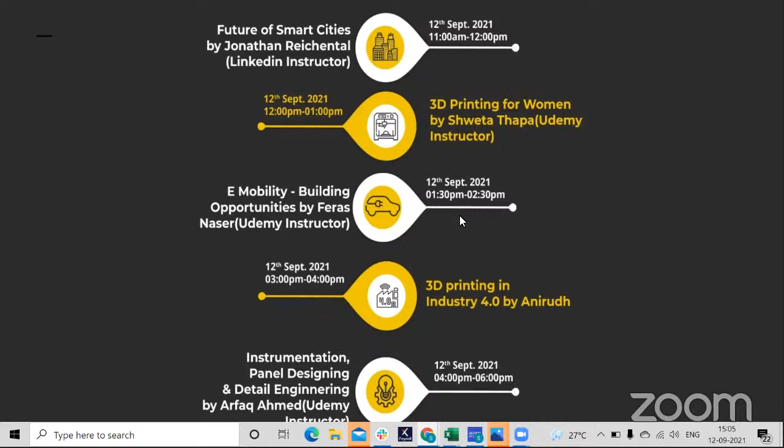At 4 p.m. we are going to have our final workshop on instrumentation, panel designing, and detail engineering by Arfaq Ahmed. He's also an Udemy instructor, and you can get a lot of benefit from that.

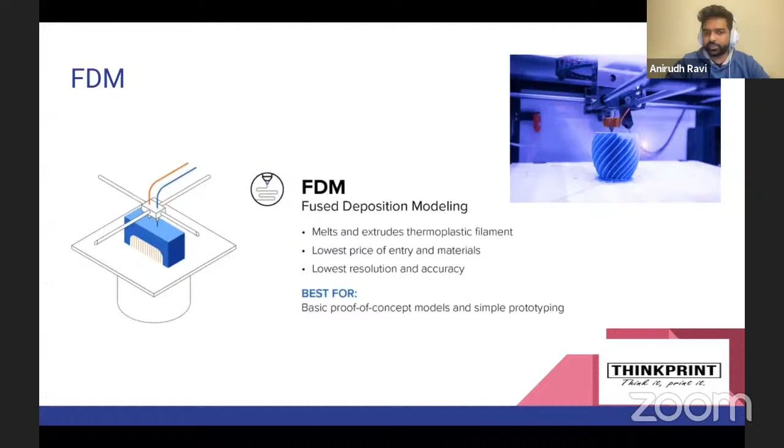Going to the next one, we have SLA, or stereolithography. In my opinion, this is the coolest 3D printing to watch in a time lapse, because you see a structure rising from a pool of resin. Again, using lasers, what this technology does is combine the molecules in the resin and come up with the 3D design that you've had. This technology can again be used for functional prototyping, patterns, very complex designs, and tooling and molds. It's also very light and comparatively very affordable.

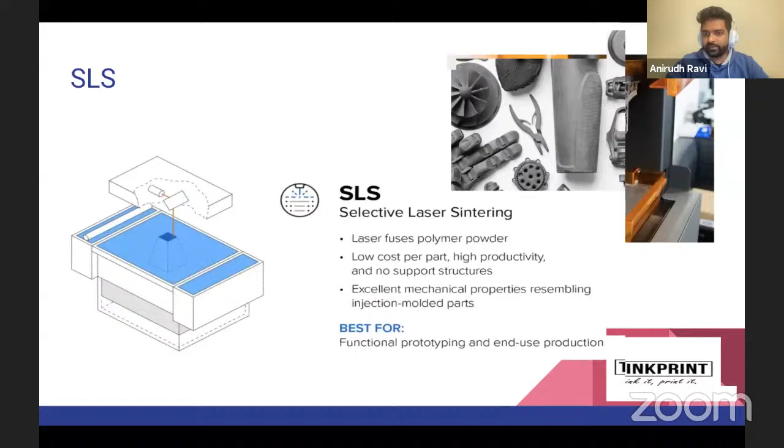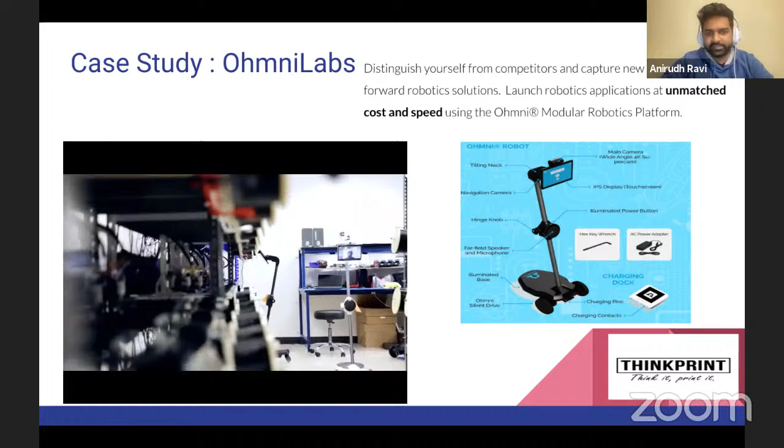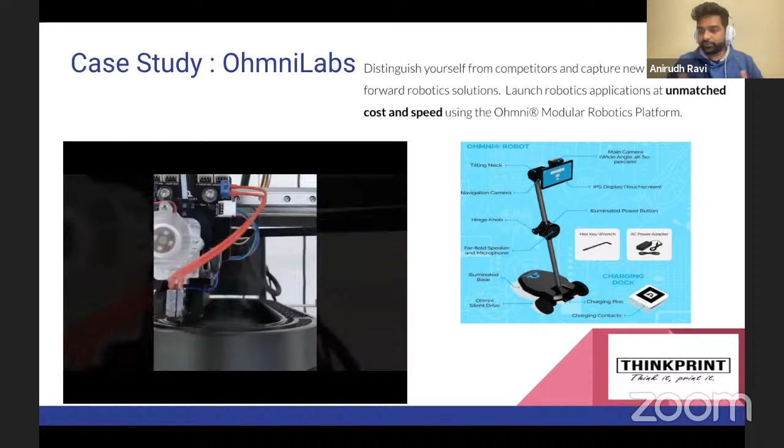That brings us to the first case study, talking about OhmniLabs, where I was a part of the team for a very long time, and I still work with them in some capacity. They are basically a robotics company that produces a modular platform. So their entire idea is they have technology reuse of 90%. They can reuse 90% of their technology in all the different robots that they are planning to make or about to make.

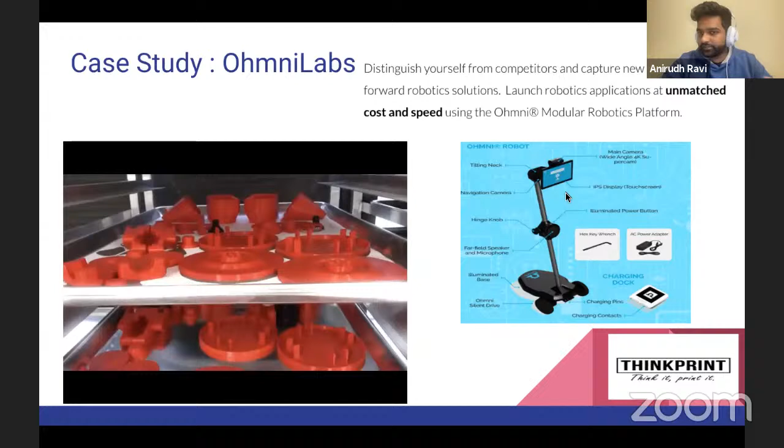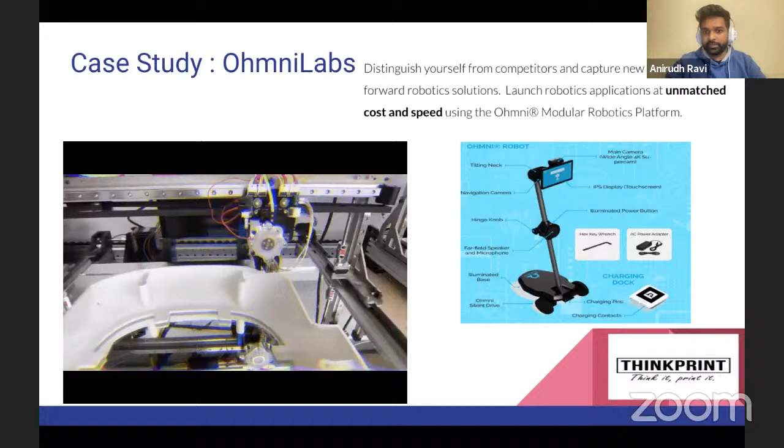The robot that you can see right here is a Telepresence Robot, which can be operated from anywhere in the world. So if you have one of these robots, it could be sitting in Delhi, you could be in London, and control the robot, move around, talk to people,

take a look at your manufacturing facility, make sure that all processes are going well. So basically multifunctional, right? But what they do is they use 3D printing to manufacture all of their robots. They've sold around 5,000 robots over the last 3 years. And even during COVID, they were able to double their production because they had 3D printing integrated into their manufacturing process from the beginning.

So what that allows is to use the basic internal components of the robot, but create any external body. So if tomorrow a big company like Google or Volkswagen comes to us and says, hey, we like this robot, but we would like it to look different, we could do that because we have a 3D printing farm, one in Vietnam, one in the US, and it just prints out different components of the robot, and most of the technology is reusable.

So in this way, OhmniLabs has a lot of potential to scale. Easier prototyping, and much more reuse. So it cuts down a lot of costs for them, even though they're releasing new products every year.

Going to the next case study. Here we're talking about Volvo, which everybody on this call probably knows, but a lesser known section of Volvo is they make construction equipment. Like you can see here, a huge hauler, which is used in mining.

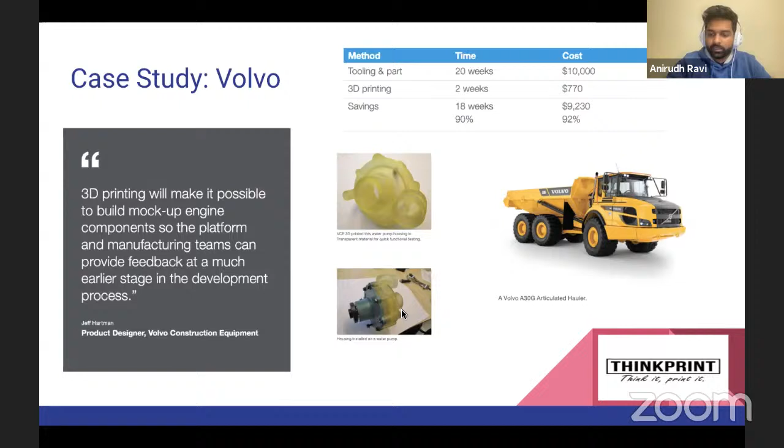So what they basically do is use CAD modeling to get a 3D scan of the patient's mouth and put it into a CAD file and start 3D printing it, where a doctor digitally simulates how the dimensions should be. So a doctor and a technician are involved in designing the course and plan, but all of their products, the final product that the customer gets, their entire Invisalign braces, are 3D printed.

And they also use stereolithography. They use some very high-end, complicated materials as well, which does make their product very capable, actually. And they mentioned, I did talk to one of their sales representatives and was just talking to them about what they thought about 3D printing and how it's helped them.

What they say is, printed molds can be used to make retainers basically on the same day as you get your braces out, basically giving you a better customer service. A lot of doctors actually get roped in, so they tie up with clinics to get their customers. The sales rep also said printed molds are more accurate than the previous method where patients bite into clay and you give it to a lab.

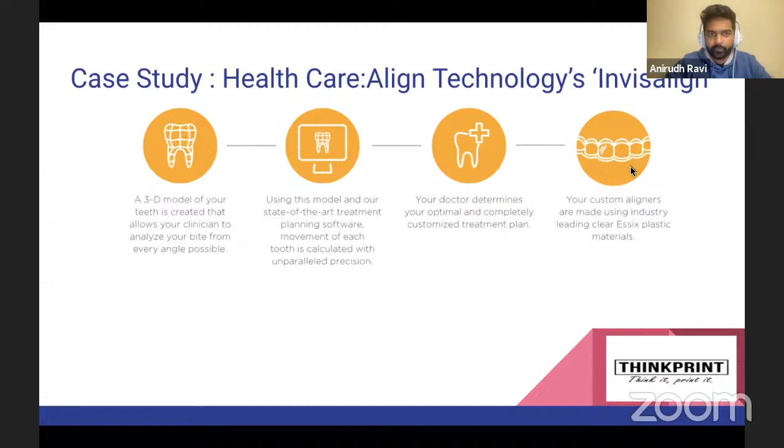That being said, all the benefits of 3D printing need to be applied regardless of company size. That's why ThinkPrint is trying to push this effort, where we provide services to our clients so they can use our 3D printers regardless of their size or how much funding they have, to use it at any level they wish. Even if you want one prototype and one 3D printer, great. If you want to use 100 3D printers and have a back-end supply chain set up, you could do that as well. And all of this on demand.

So a few things we're working on right now are consumer electronics, consumer goods packaging, and automobile parts. We're also partnering with companies to help them manufacture drones, robots, custom consumer goods, healthcare products, and tooling, basically trying to provide manufacturers custom tools for their machines on demand. It's very difficult to find, and sometimes has to be shipped all the way from Germany. But if you have the design and the right design team to make it for you, you can make it on demand within 24 hours or less.

In the future, ThinkPrint has an expansionary vision. What we're trying to do is have 3D printing farms set up in major manufacturing hubs across India, giving our customers the ability to access distributed manufacturing capabilities. So say something breaks down in a factory in Bombay and you need a tool - instead of shipping it all the way from another country or from Chennai, you could 3D print it right in Bombay and fix it.

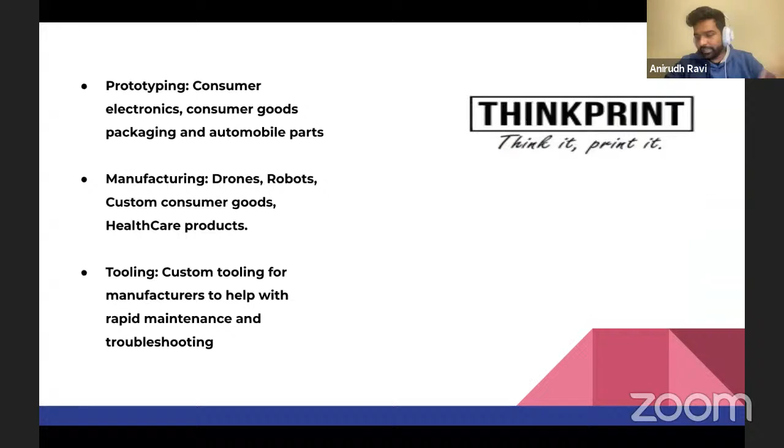That being said, right now I'm open to questions. Anybody who has questions can ask me, and that'll be where we end this.

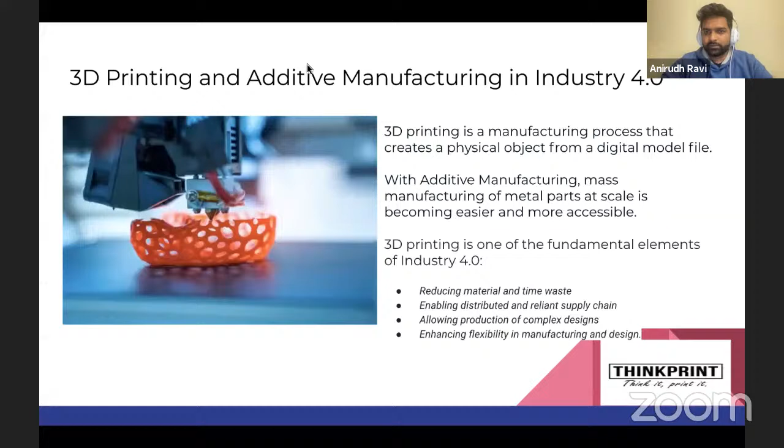When you think about manufacturing or 3D printing in this instance, don't just think about the CAD modeling and software involved, but think about how it works on the cloud. Can you simulate stuff? How can augmented reality come into 3D printing? Can you design something in an augmented space that you can then 3D print? Can 3D printers talk to other machines and start producing tools even before you ask for it? Is that possible? So think about it from a holistic point of view, where you need to understand all of these components to be part of the future of manufacturing, and to also be valued by your company.

A lot of companies value people who understand the different aspects. So I would say don't narrow in just now because you're all students. Keep your minds open and explore all of these opportunities. But 3D printing is amazingly future proof, it has a long way to go. So if you decide to go for that, do it without any second thoughts.